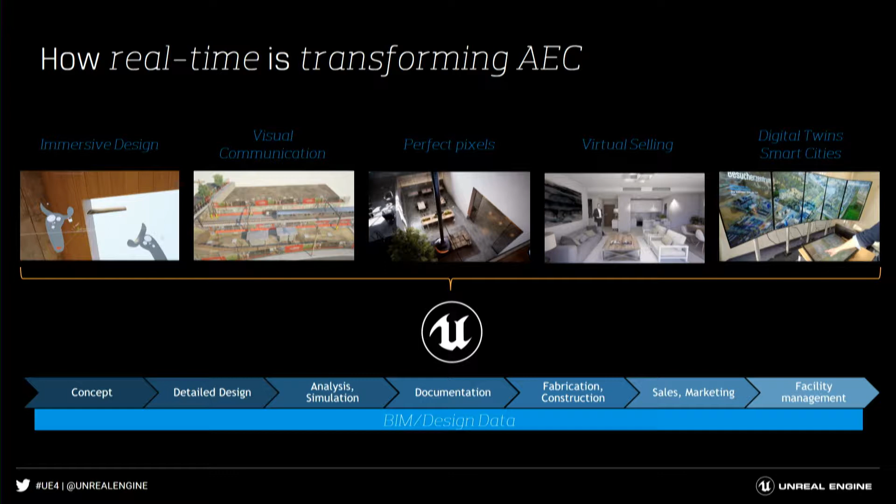So we're going to talk about 5 different ways that real-time is transforming AEC across the architecture pipeline. You have your BIM data and your design data, but how do you leverage that more for your processes? So let's just jump in and take a look at it.

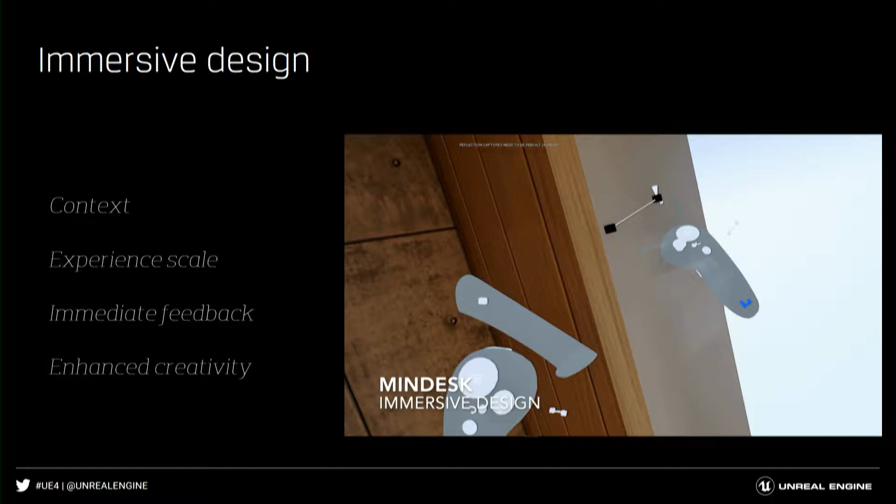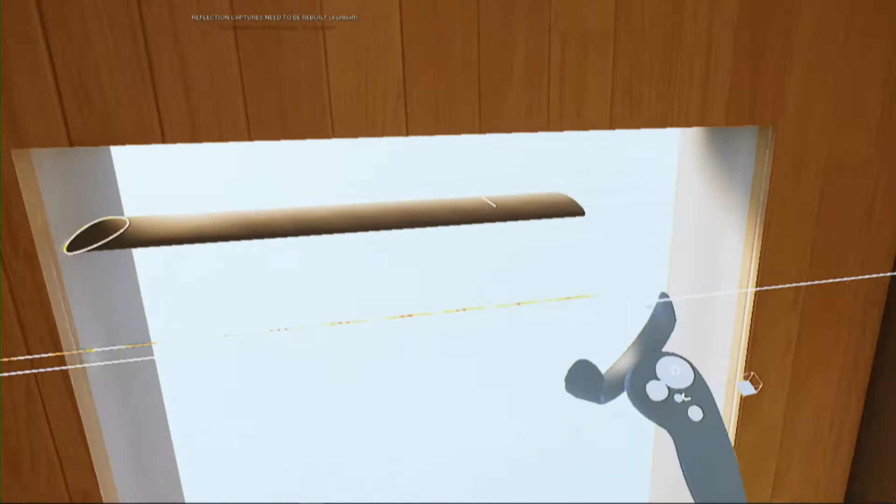We're trying to show you things that maybe are not normally associated with real-time. So one of them is the idea of bringing these real-time techniques directly into the design process, early stage concept design. So we have a partner, Mindesk, and they have created a real-time link between Rhino and the Unreal editor. So you're here in Unreal, and you're talking to Rhino. Rhino's updating as you interact with it and design.

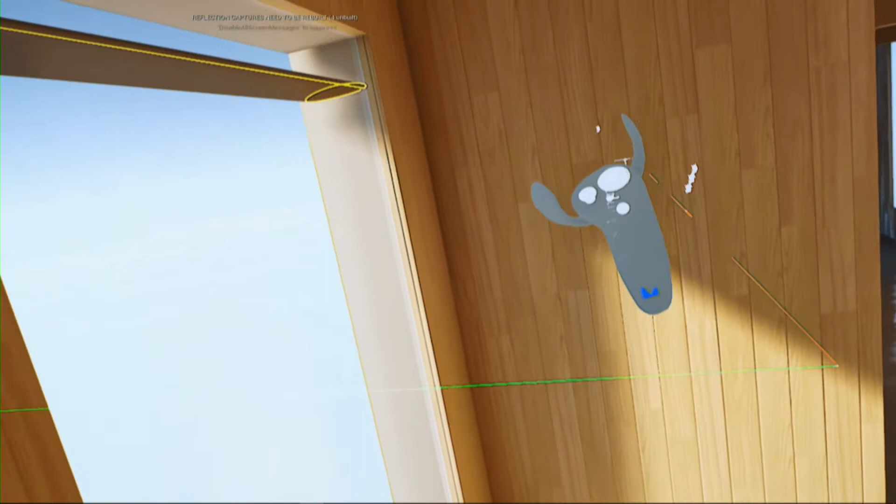So the output of this is a Rhino file, right? This is all happening, dynamic connection to Rhino. So you can see the effect of design using highly realistic lighting, highly realistic surfaces. And this can be a big feedback loop for you and your creativity.

Visual communication—the previous presenter was showing a lot of complexity on how that tower was built. So how do you tell that story in a way that stakeholders get it? Often you're talking to people with limited technical understanding, and showing them blueprints and engineering drawings just isn't going to work.

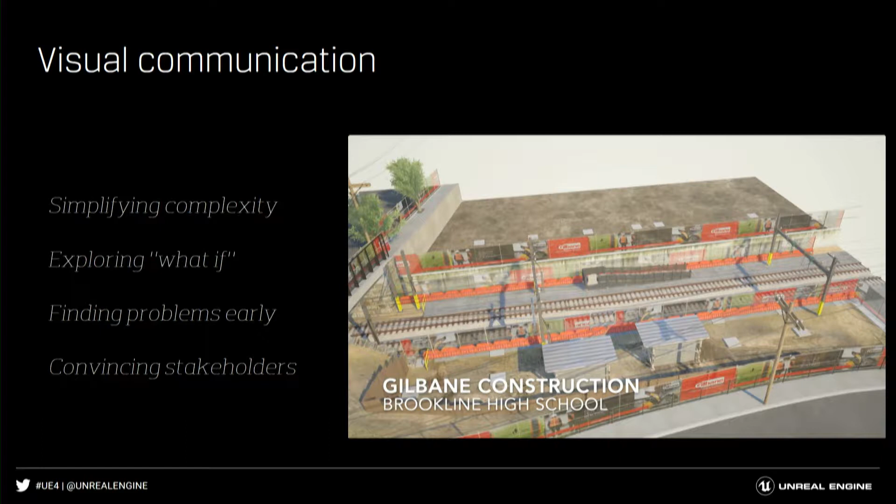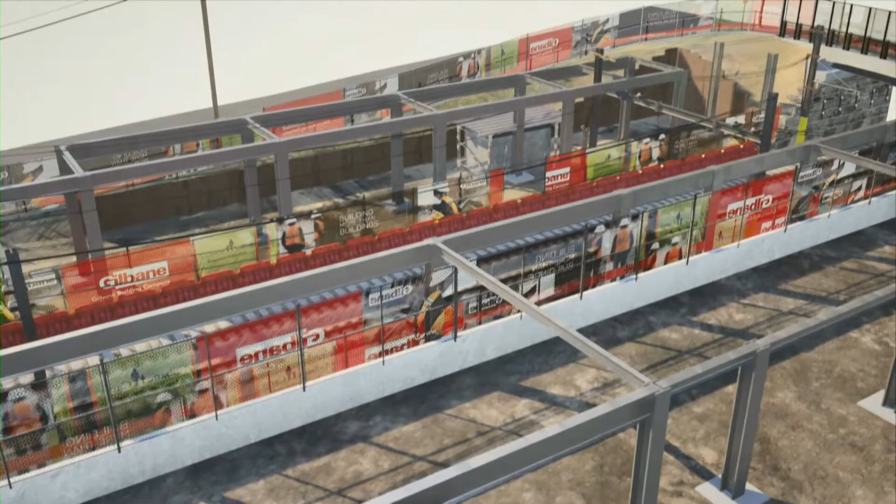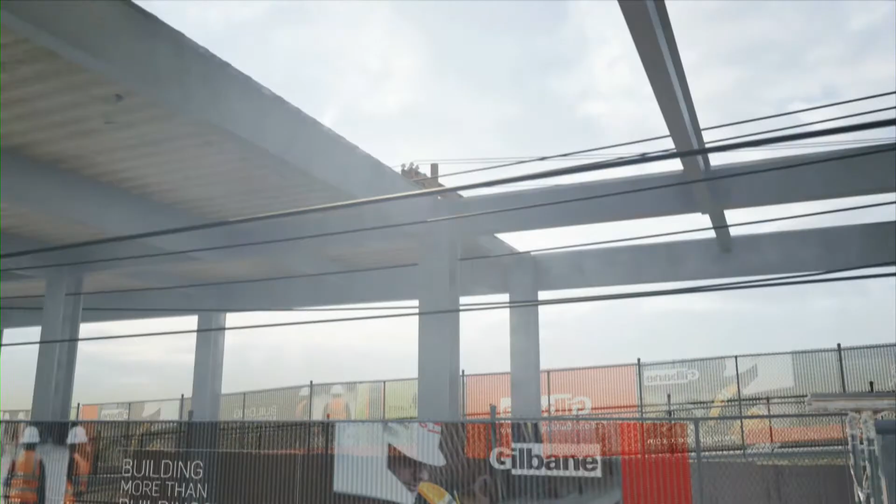That might be the difference between winning a project or convincing stakeholders to get approval. Gilbane Construction was going to build a high school on top of an operating railroad line—they couldn't shut down or stop the trains, so they had to convince stakeholders it was possible. You could do this with traditional CG, but doing it in the engine means you have an interactive experience. You can fly around it, go anywhere you want.

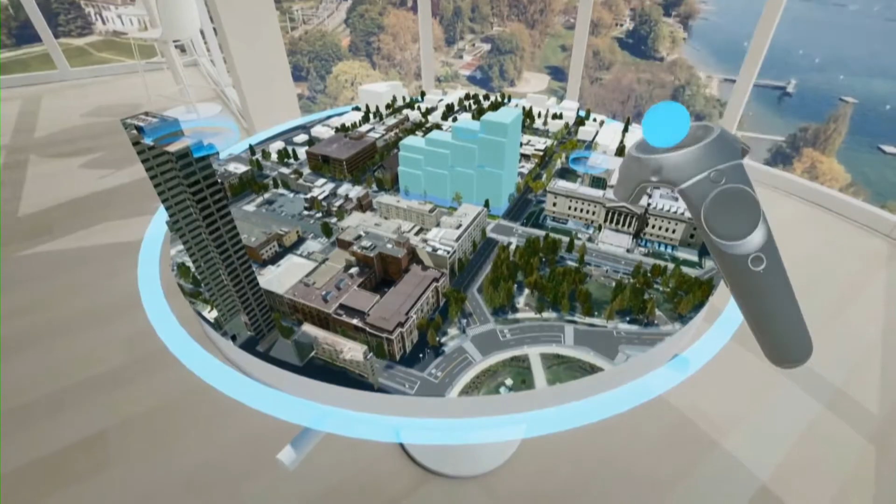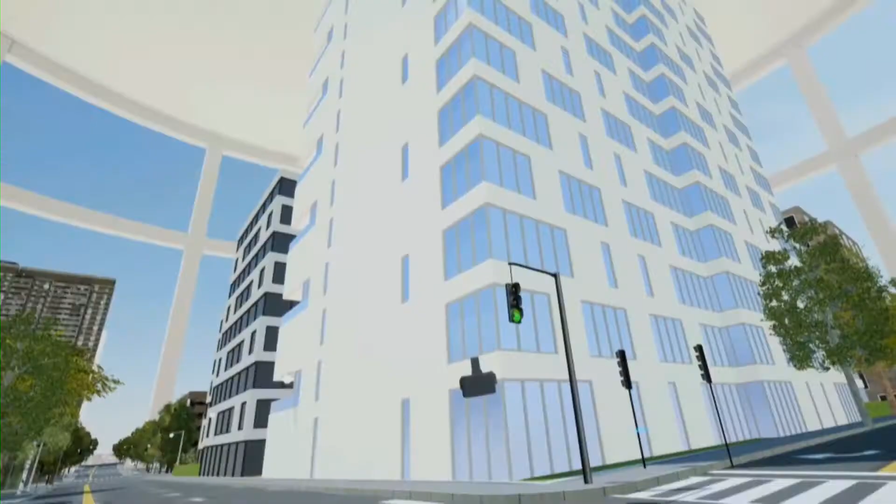Esri is a partner. They built a free template to bring data from City Engine, their tool, directly into Unreal Engine, and then you can look at different alternatives to buildings within this city context. You can also change the lighting, and then drop down inside and look at that scale model at 1-to-1 scale. HKS, some of you may be familiar, is a large architectural firm focused on a lot of sporting events—this is the new Rangers Stadium.

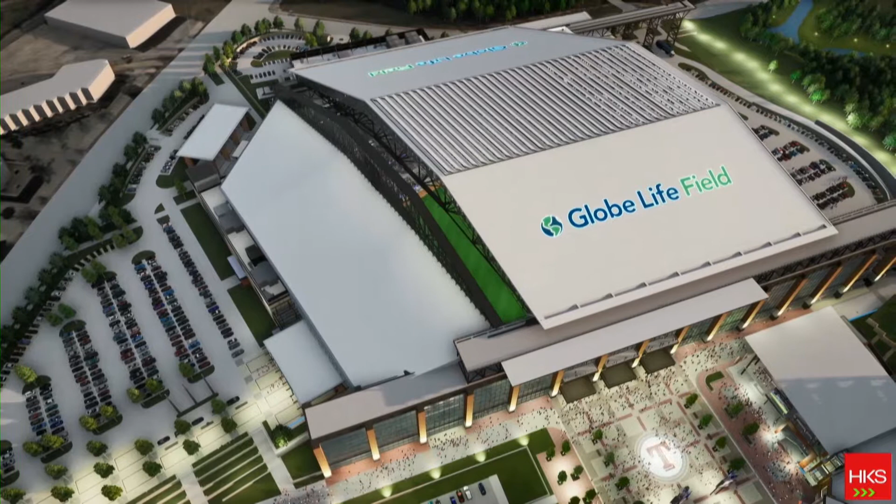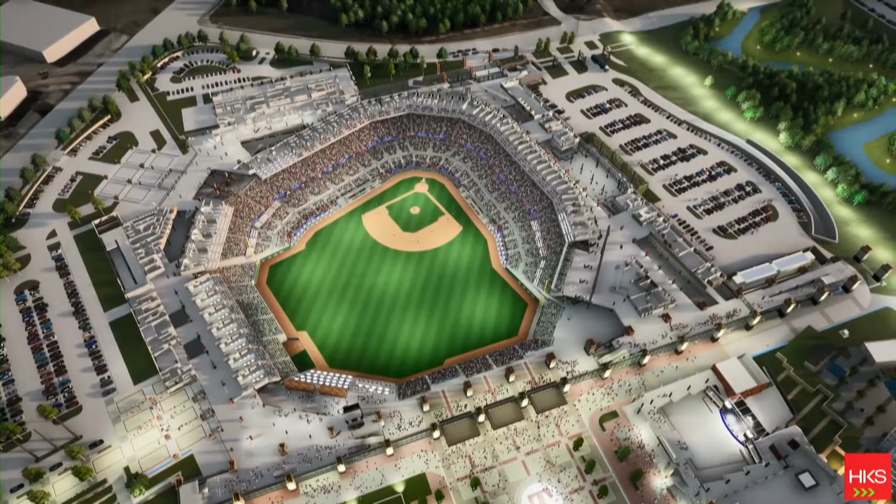This is all based on engineering data, brought into Unreal Engine. There are actually two stadiums in this scene, populated with people—100,000 people in total between the two stadiums, wandering around the complex.

You have to be able to meet these problems where they exist. The engineering data is massively complex, so we have to be able to bring that in, interact with it, and have the tools to get your story across.

This is kind of what we're well known for—I call this 'perfect pixels.' It's the idea of high fidelity renderings, and you probably saw some in our show reel already. We just released our ray tracing capability back in April, so we're showing it in our booth on a couple of laptops. This is about taking it to the next level.

Here, somebody brought together this scene—I think it was Cinema 4D—brought it into the engine and did their light development there. This is all rendering in real time with ray tracing, so it's no longer this massive trade-off. When you have this kind of visual quality feeding back into your choices of lighting and materials, you work so much faster—you're more creative.

Here's another scene, done completely in ray tracing—there's no baked lighting here. Again, the visual fidelity can really help you when you're trying to show people what your design is intended to be.

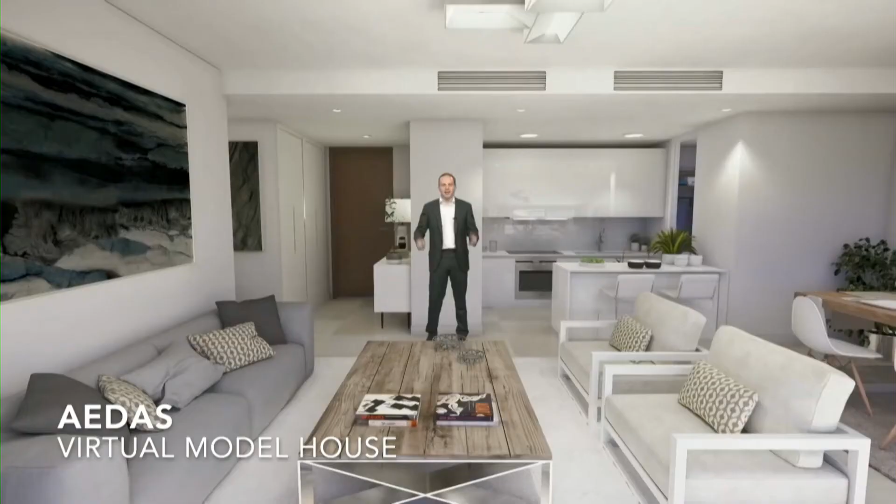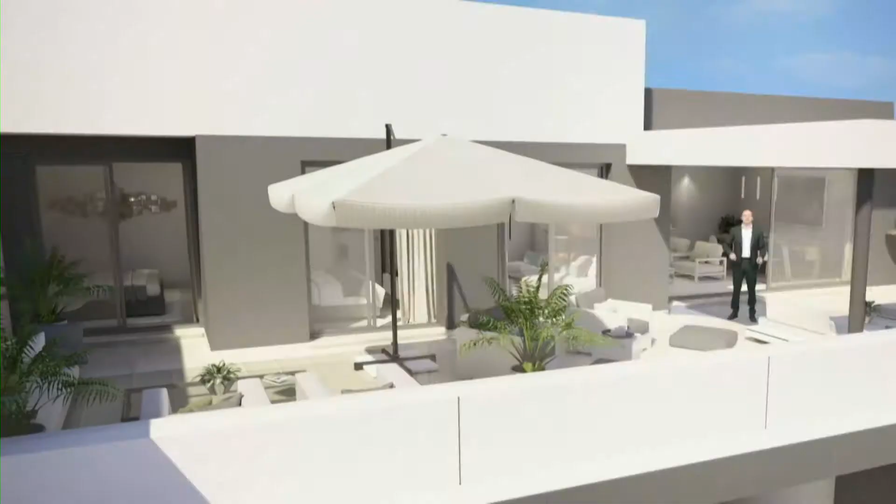The first example is a Spanish firm selling undeveloped real estate in Spain to people all over Europe—that's a challenge. So what they've done is taken the idea of a broadcast virtual set, combined it with Unreal Engine, and put the salesperson into the 3D model of the design, so now the salesperson is having a dialogue with the user.

Line Creative is here with us at the show. This is a typical example of high fidelity configuration—a very common problem. I want to show someone the different treatments, but it needs to be of good enough quality so they get the right experience.

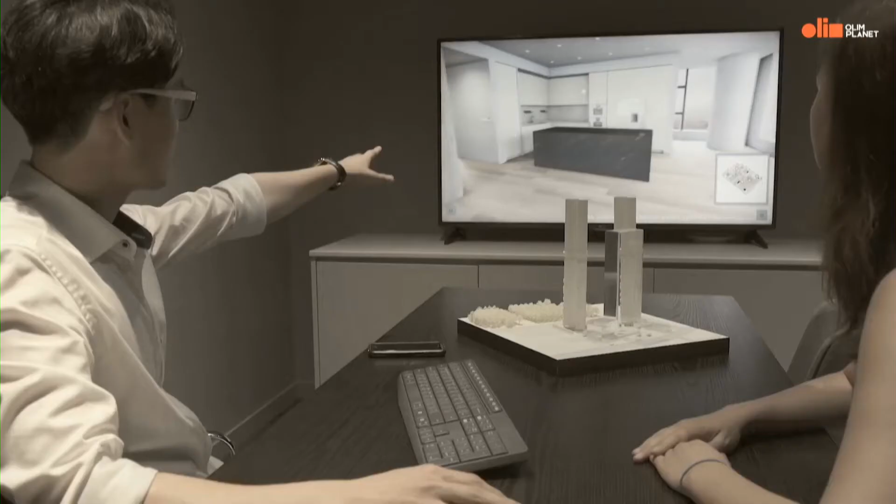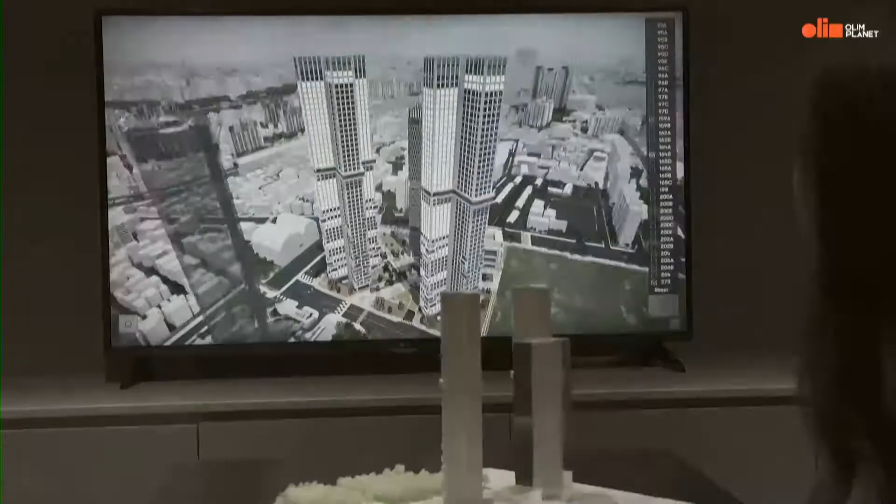Olim Planet, a Korean company—I love what they've done. It's a huge virtual room. Each of those windows is actually an LCD panel, and they give customers, who are selling tower apartments, their view outside the apartment. They can also do the traditional configuration, here's what's available, let's interact with it. So it's a combined, complete configuration and selling system.

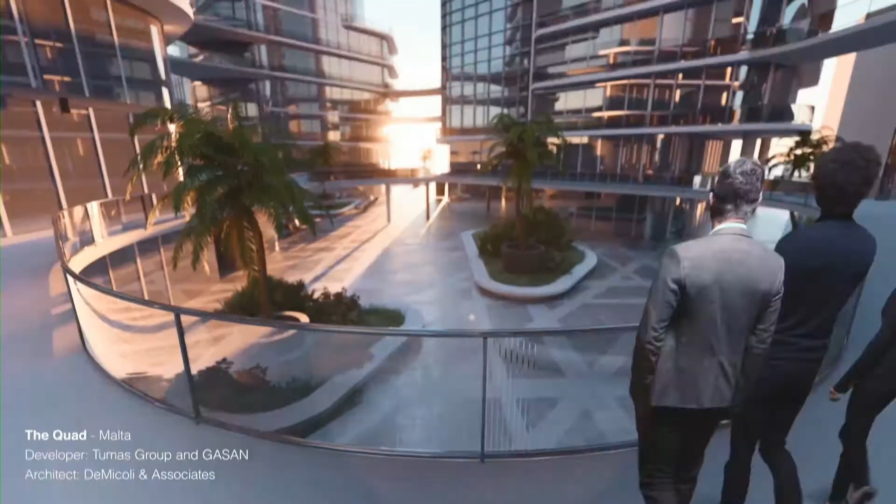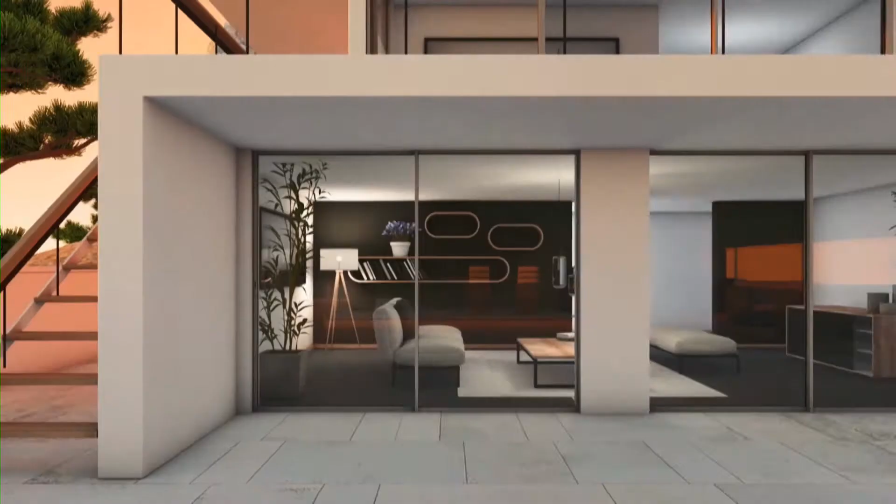Reynaers is a large Belgian manufacturer of sidings. The customer is going to commit to this large project, so they bring all that data together into Unreal and put it into what's called a cave. They have one of the highest-powered caves out there, about 14 projectors. They've made a big investment to do it, but they can bring that data to life in a way that's very hard to do otherwise, and it can be collaborative.

They can get multiple people in there looking at the data. So lots of ideas around how to take the data, how to take it to the next step for the purposes of selling.

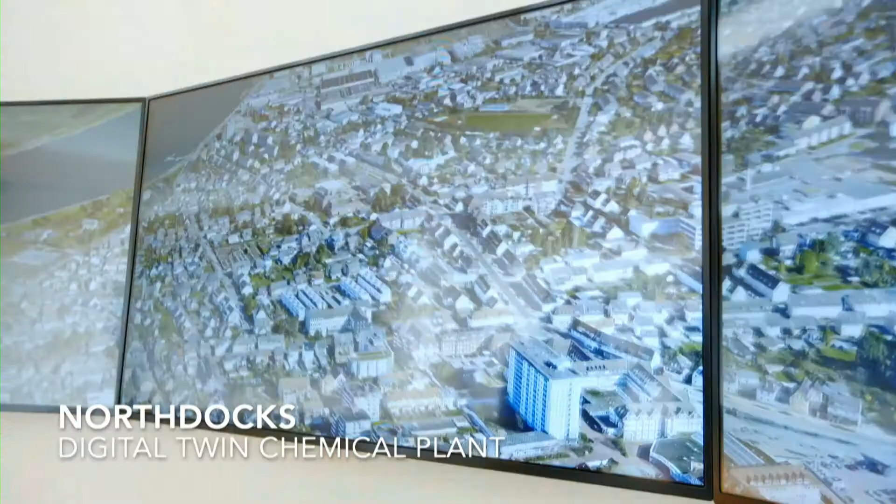Digital twins in smart cities—some of you may be familiar with this. It's the idea of bringing together real-time data, maybe IoT data, sensor data, and having this digital model to interact with it. NorthDocks is a German firm. For ChemPark, a large industrial chemical plant in Germany, they've created this digital city using photogrammetry, and mapped onto it different ways of getting additional information into it.

Here it's a fire truck responding to some event. Basically, the idea of a digital twin is it gives you all this context that might help you solve a problem, or resolve it quicker. If you can understand a fire or something quicker, that can save lives.

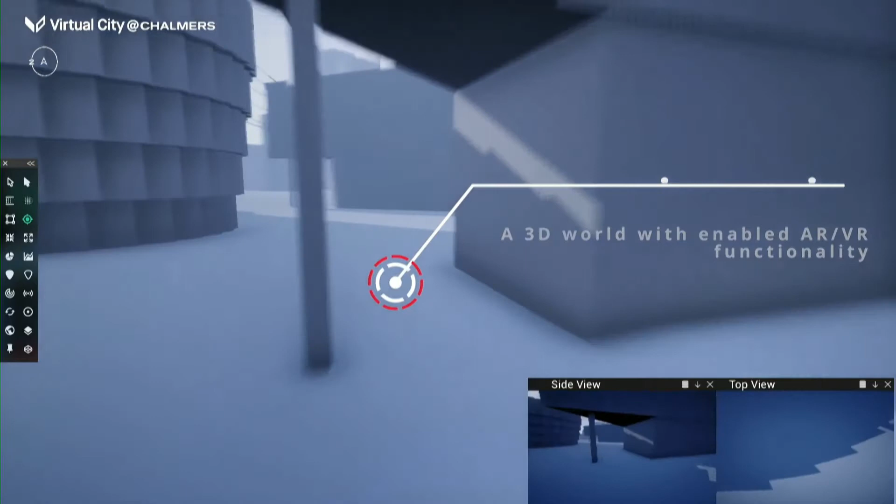Chalmers is working on an open platform, open source, for digital twins of smart cities. They're bringing together all the data and making it all available for free. They have VR interfaces, AR interfaces to it, and it's all based around Unreal Engine. They can do really interesting things with driving road networks, creating new road networks. We'll have a new video of them with all their new features soon. So a lot of exciting things going on there.

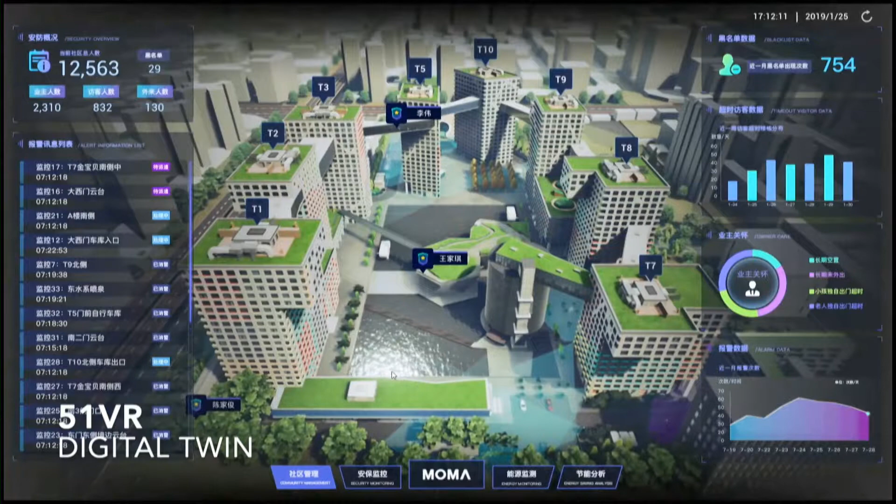From China, 51VR built this digital twin of a new site. There's all sorts of things going on between the cameras, the image recognition they do in China, and how to manage this site either from events or from a security perspective—how to look at things like power plants, engineering plants, and what's going on there. Again, it's a way of bringing together all this abstract data in a context that will help you solve problems or understand the situation faster.

So what makes this all possible? Unreal Engine. I'm just going to briefly give you some information, some background on that.

When you download Unreal Engine, it's free. You get everything—again, it's the complete package. We're not trying to upsell you or anything. You get Unreal Engine, you have all the tools, and it's free. There's a lot you can do, as I just showed you.

Just to reemphasize it, once you create that Unreal asset, you can use it for any of those different kinds of applications. You don't have to go through another step. That asset, once created, can be used in all of those different ways just by reconfiguring how you want to use it.

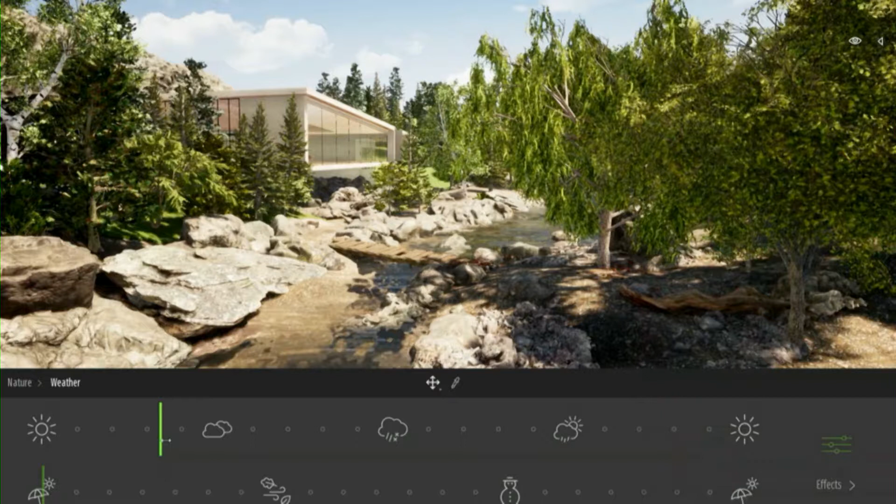It's really intended to be very easy to use. This gives you an example of the interface. If you want it to get rainy, you just drag the slider for the weather you want. If you want snow, you go to winter, and now you have snow. The vegetation responds, so you don't have to think this stuff through—it just does what you expect it to do.

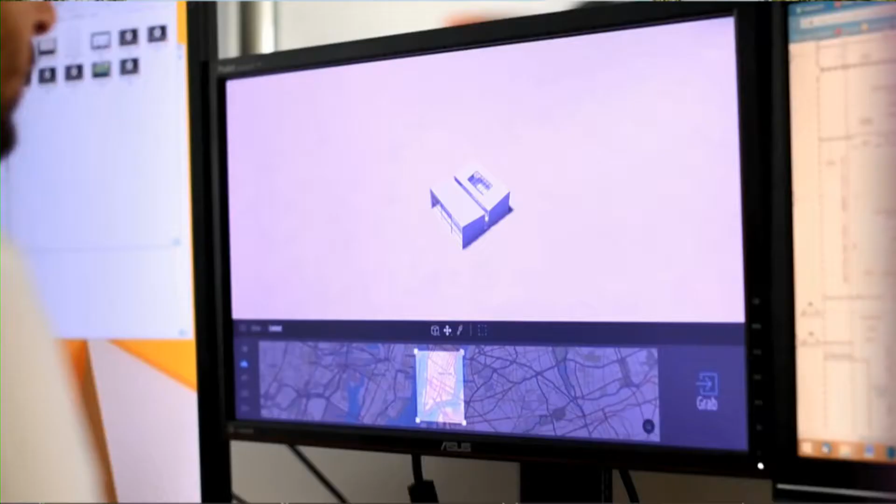Hopefully you saw an interface there that was easy for you all to use. Don't take my word for it—just go download it. After a month, we've had 100,000 people register for Twinmotion, so clearly somebody's finding it useful out there. We're excited because it's now part of the Epic family, and over time we can do more with both the Unreal Engine that drives Twinmotion and all the new features we're creating in Unreal Engine itself.

Just a couple other things. There's free online learning targeted at architects—that's for Unreal Studio. We don't have that yet for Twinmotion, but honestly, you should be able to download Twinmotion and get straight to work. It's that kind of product.